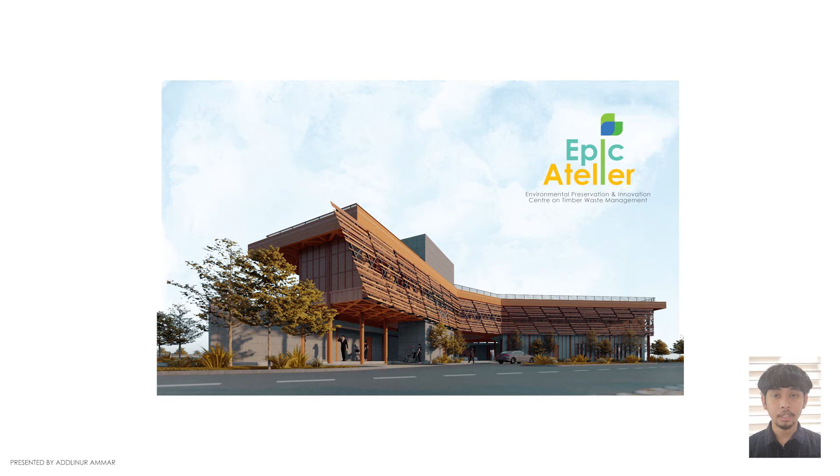Located in Medini Iskandar Puteri, Johor, Epic Atelier is a three-story environmental preservation and innovation center that focuses on timber waste management program. So, why timber waste management?

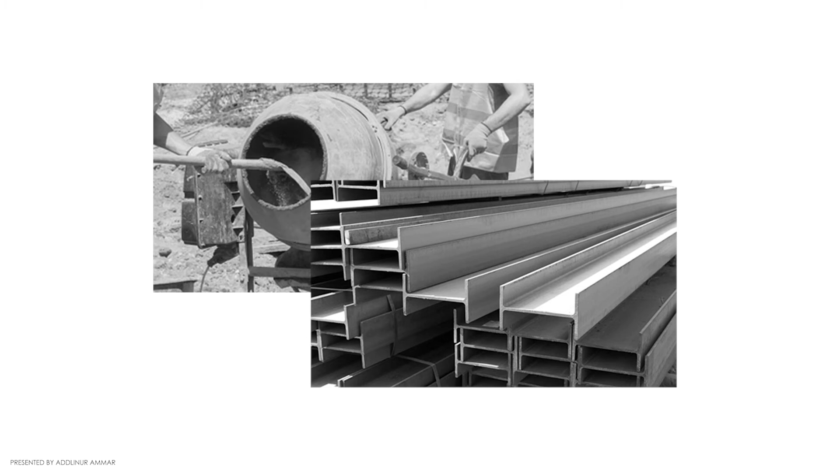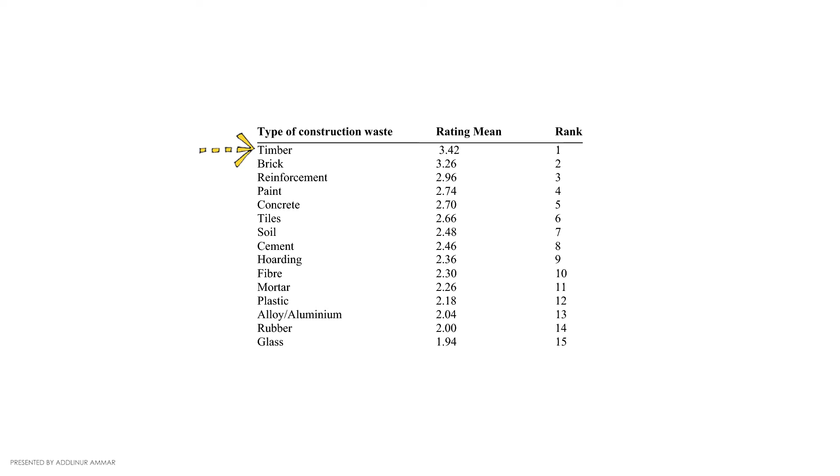With the issue of urbanization, Medini Iskandar developments are mostly built using steel structure and concrete material, which manufacturing will contribute to 8% of greenhouse gas emission. While constructing this material, another type of material is wasted, which is timber. Because timber is widely used as temporary support during construction, it was labeled as the highest product of construction waste. Thus, the program was created.

Then we bring this concept, the Seeding Community, which purpose is to cultivate new knowledge on waste management by integrating it with the public community to widen the spread of knowledge about timber waste management, to achieve sustainable places and promote well-being. A strategy to attract the community to come to the building is by recycling timber waste as facade shading throughout the building to create an interesting sustainable design feature.

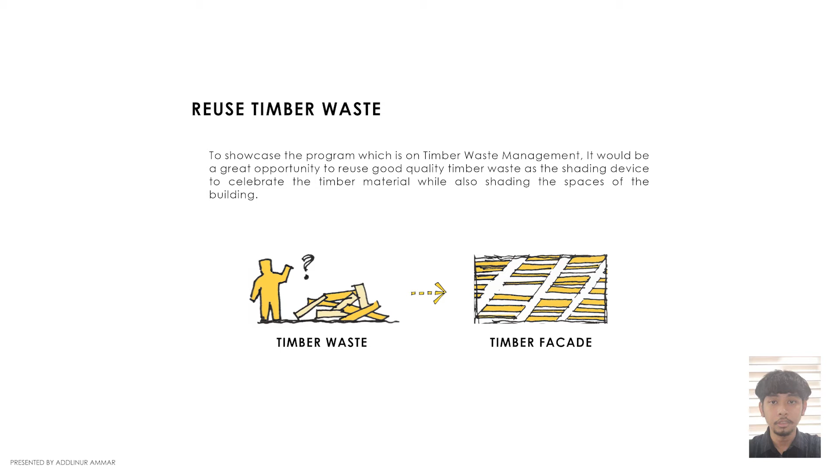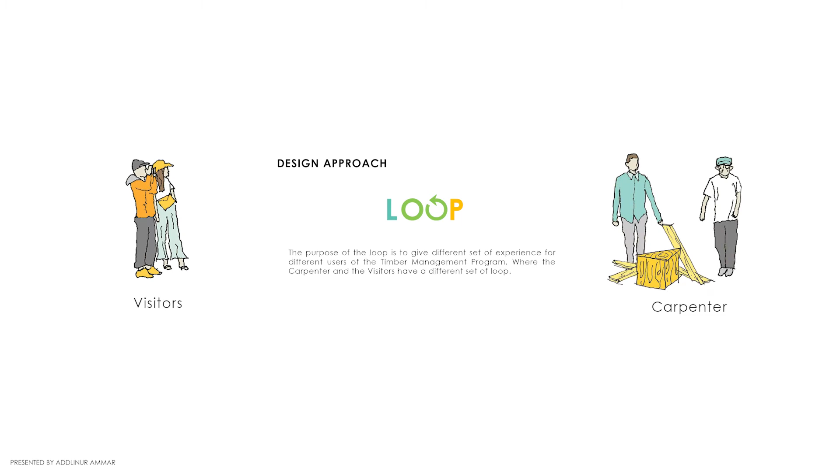So, to strengthen the concept, an approach to look at two different users, which is the visitor and the carpenter, are used to ease the program flow.

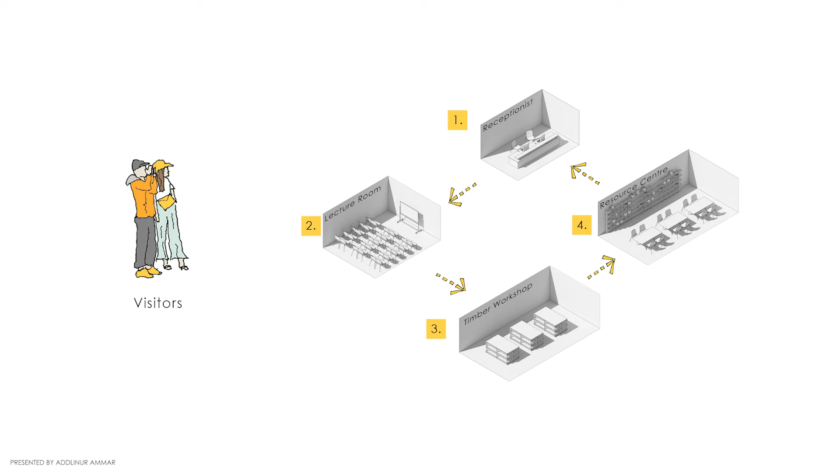Visitors would experience a linear motion of program flow from the reception to lecture room to timber workshop and end with the resource center. But for the carpenter, they will experience a more dispersed loop which starts at the timber workshop and disperses toward resource center or discussion room or lecture room, eventually looping back to the workshop area.

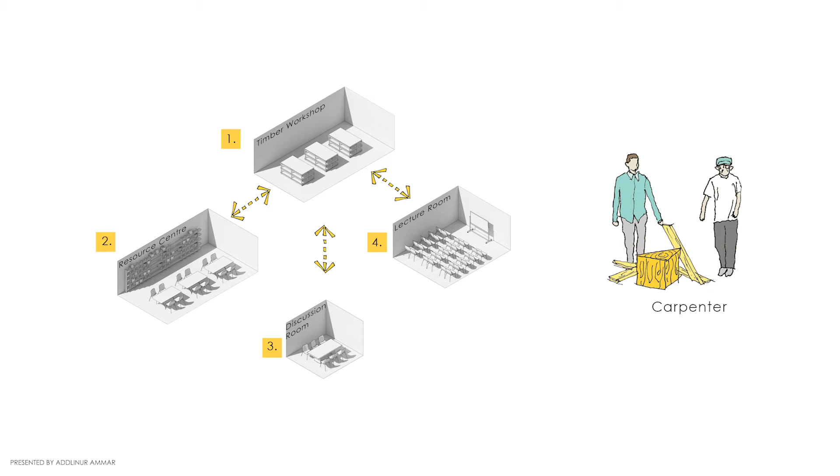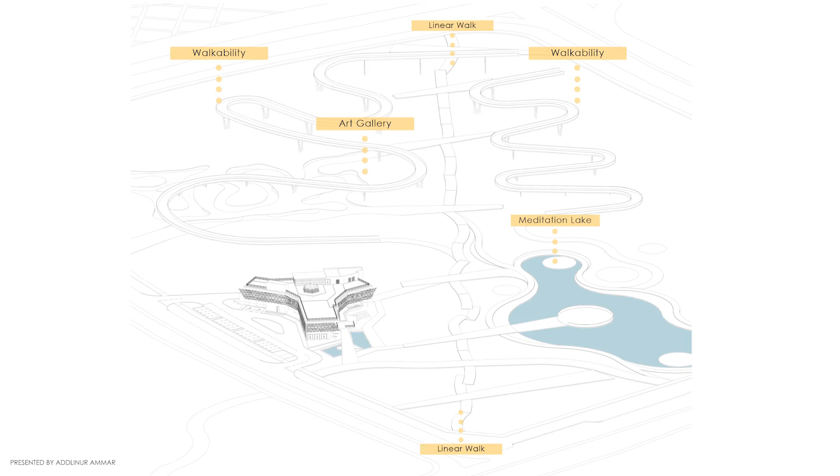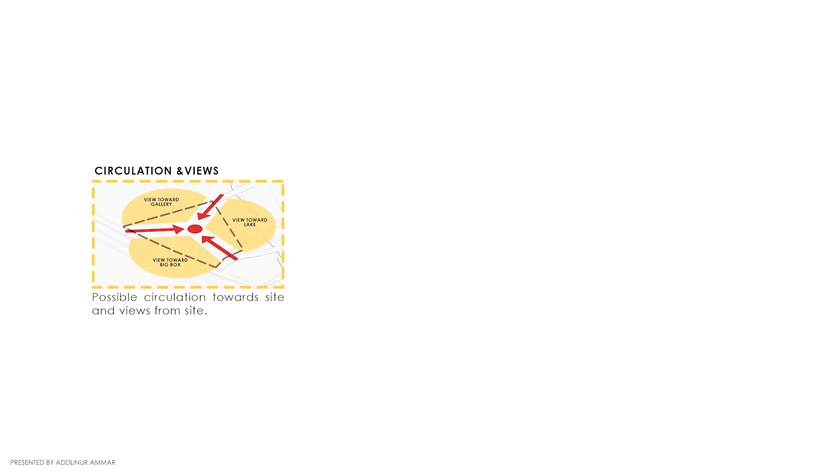The process development starts with the analysis on sun path and wind path at the site, with stronger wind coming from the north and south direction. Then we analyze the possible user circulation and views on site to develop the potential zoning following the site forces.

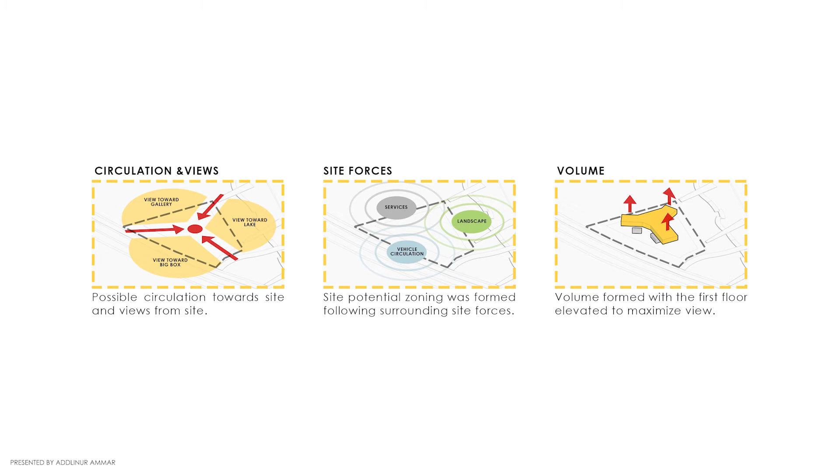This was then translated into a volume where the first floor is elevated to maximize views. This was inspired by the natural state of timber, which is the tree, where it has transparency on the lower part while absorbing the resources on the canopy part, which then translated into the typology where public is on the ground and program on the top.

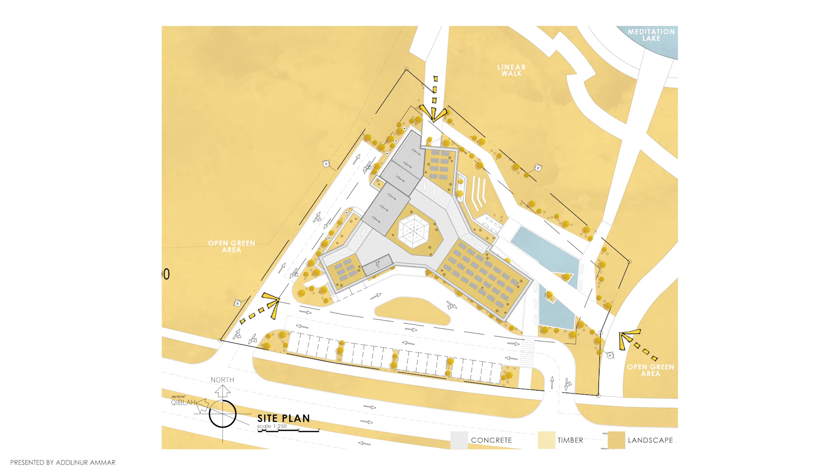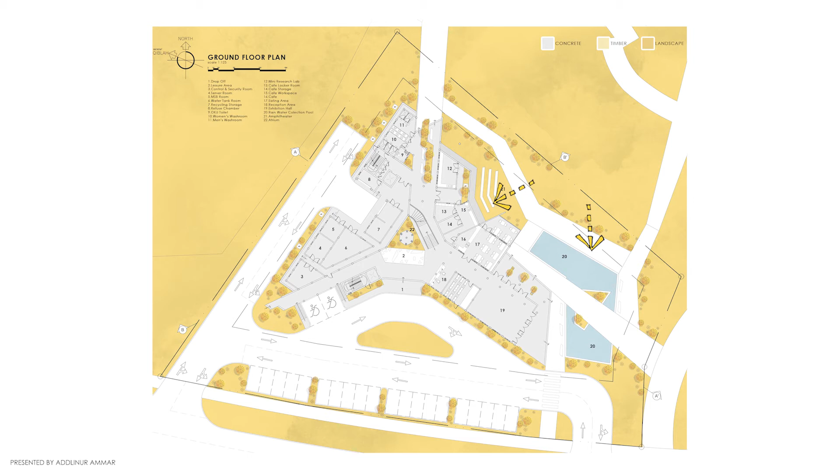They will have an amphitheater and a rainwater collection pool on the landscape, while having pavement made to connect the linear walk to the building entrance.

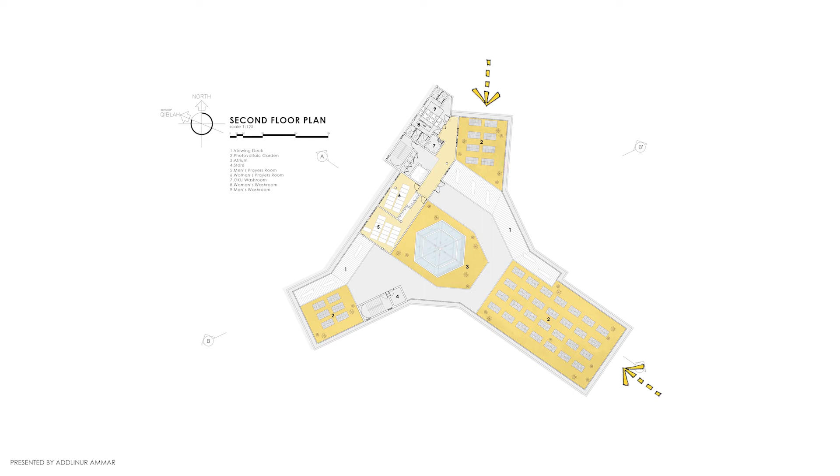On the second floor, there would be two separate prayer rooms for male and female on the indoor part, while on the outdoor, there will be three separate photovoltaic garden, viewing deck and atrium.

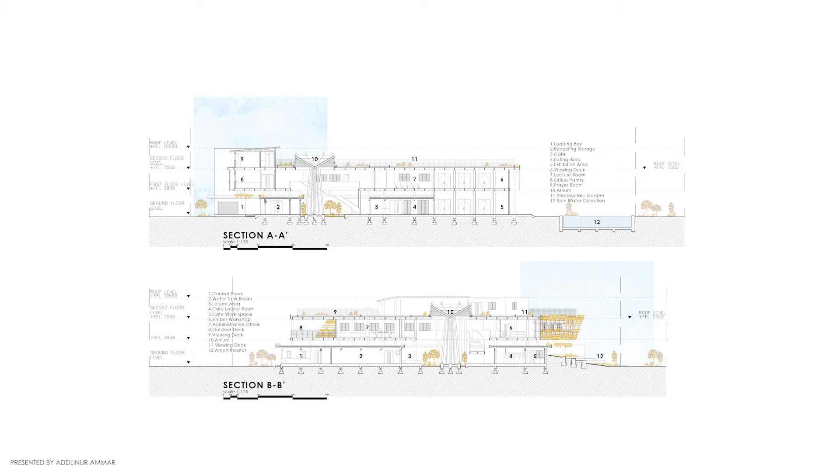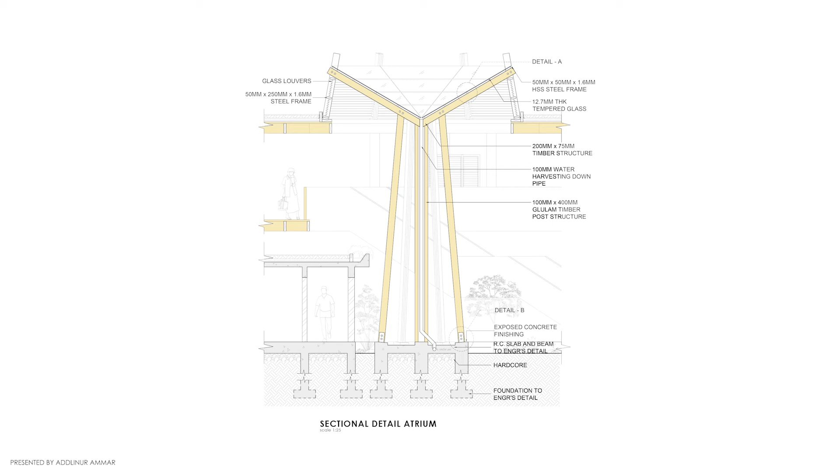Taken out from section AA, the atrium detail section proposed is to show a more detailed view of the foundation to roof construction of the sustainable part of the building. Two special details are being highlighted out. First is detail A, to show the timber structure connection to the glass skylight by using steel frame, while detail B shows the connection for the timber rafter with the concrete base by using a steel plate connector that was bolted to the ground beam.

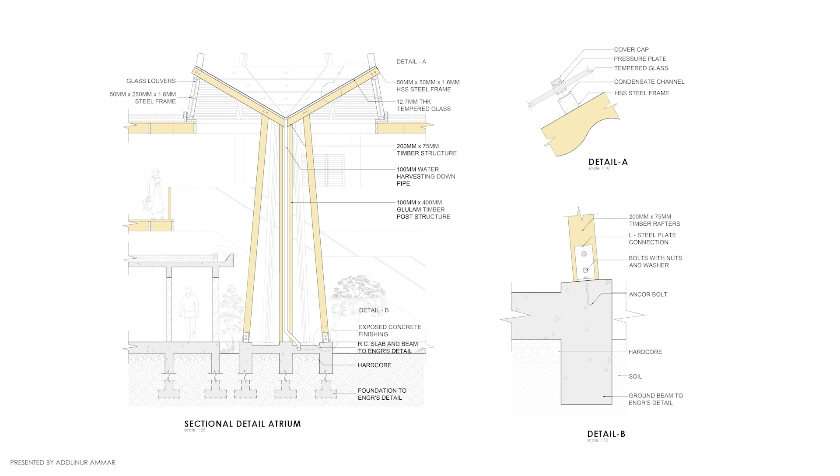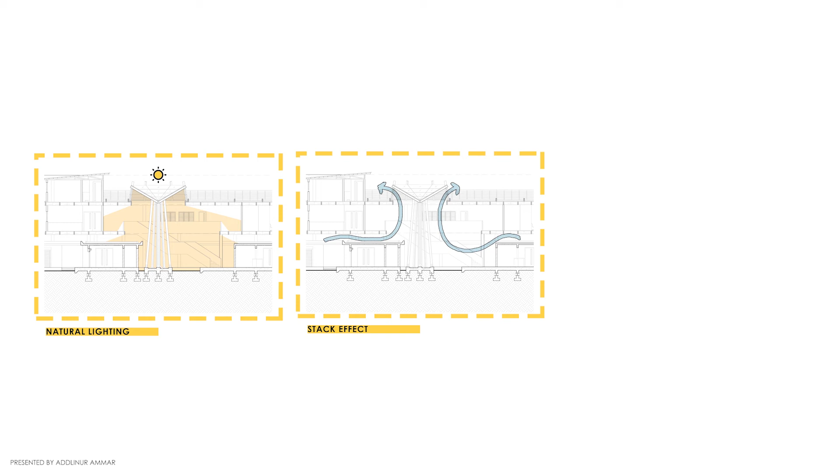The atrium acts as the beacon for sustainability, where it allows natural lighting to pass through and brighten the space. It also responds to the wind flow to create a stack effect to cool the building, and finally, having a water harvesting feature that flows the water to the pool to be recycled, used for toilet flushing.

Next is the elevation, where the front elevation shows the entrance and the drop-off of the building, where the rear elevation shows the landscape area of the site with the entrance for the pedestrian coming from the linear walk.

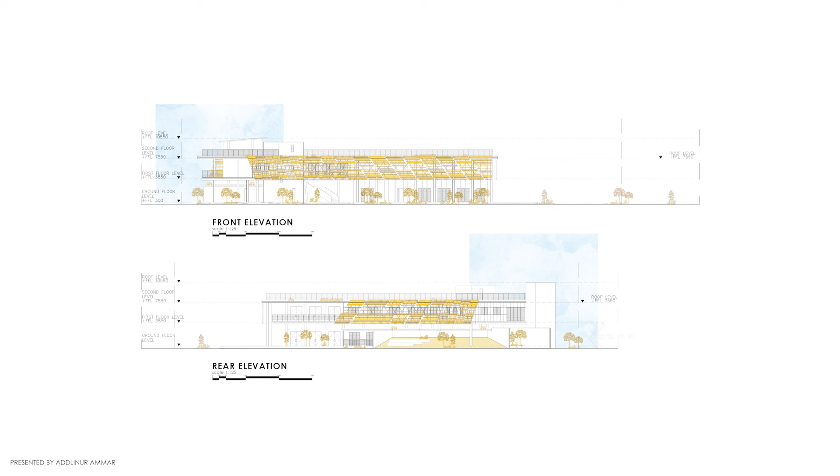Next is the left elevation, which shows the service lane with the service area and loading bay. For the right elevation, it shows the exhibition hall that has transparency to view out through the landscape and could attract public to the exhibition.